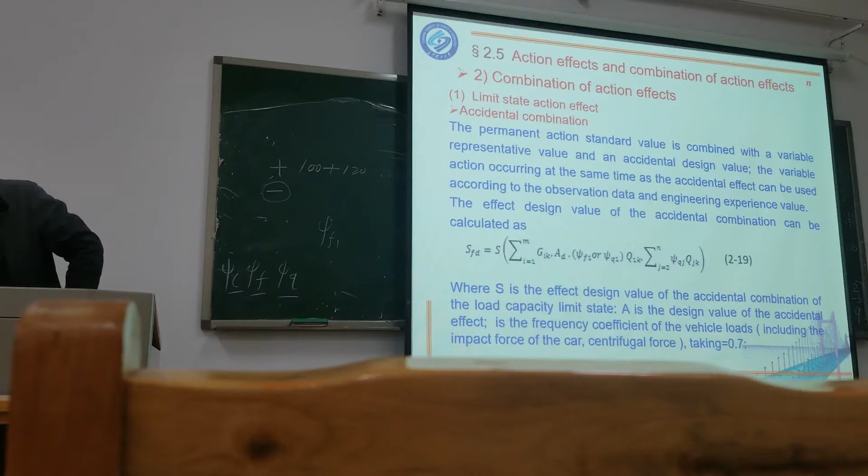So this is the second combination, the accidental combination. The third combination is the seismic combination. So that's special for seismic. Before, this seismic combination belonged to the accidental combination, but now in the new code they make a special combination for seismic because it is so important, so diverse.

So for bridge engineering, for the bearing capacity of the combination of the seismic action in limit state theory, we use this formula, where γ0 is the structural importance factor, 1.1, 1.0, or 0.9. SGIK is the permanent action effect.

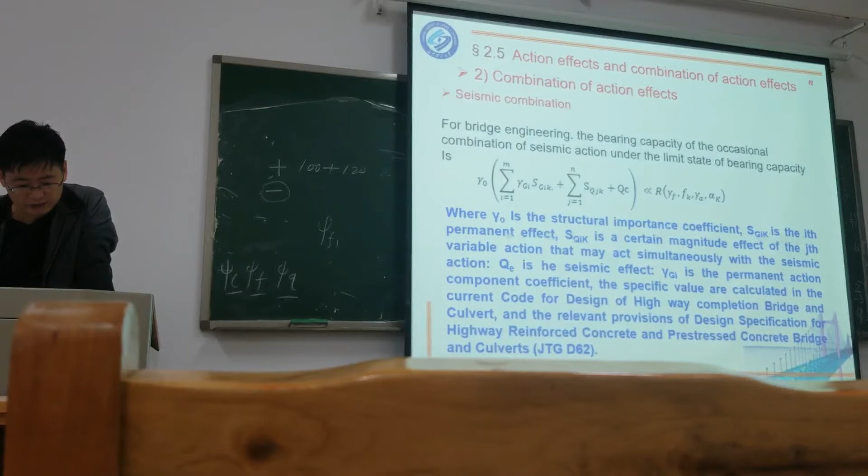QIK. Let's see. Which one? QJK. It should be QJK. Because in the formula it used QJK. Here we also use QJK. It's a certain magnitude effect of the variable action that may act simultaneously with the seismic action. So only if this can appear at the same time, you put it into the combination. If they don't appear at the same time, you cannot put it into the combination. So that means when the seismic action appears, this variable action also appears.

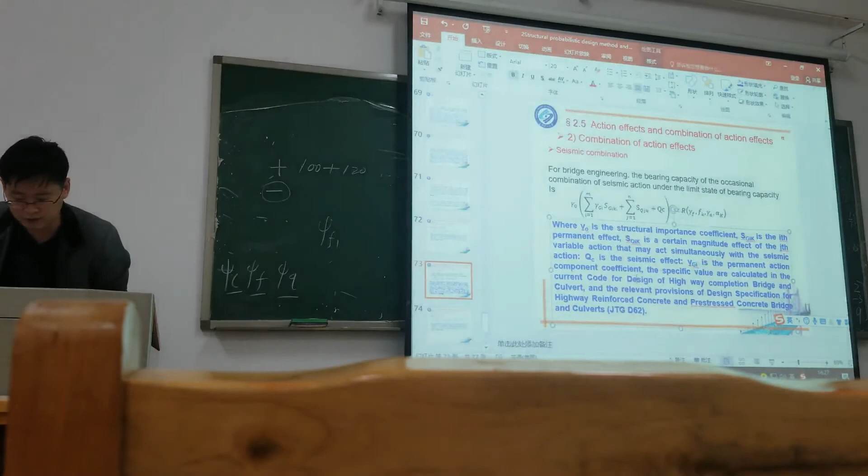QC is the seismic effect. Why are there so many things here? Translation. Here it should be QC. QC is the seismic effect. And here, gamma GI is the permanent action coefficient. Here it goes back and uses the component coefficient. Just now we used the partial coefficient.

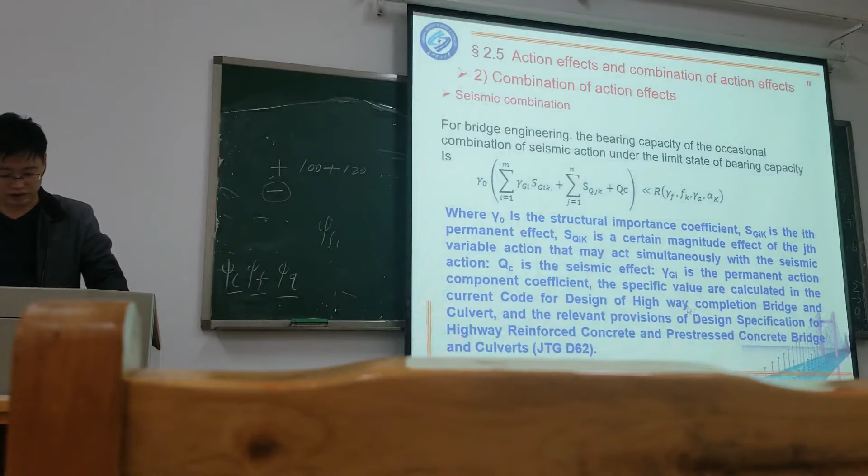Yeah, so for this textbook, it's the translation. Maybe different people translate different parts, so they use different words. Sometimes we get confused. So usually, component effect, component coefficient or partial coefficient, it's the same thing. The specific values are given in the design code for this bridge, the Chinese code. And the same thing applies where a variable effect in the combination exceeds the effect of the vehicle load, the same situation as here.

And another part of the action effect is for serviceability. The former part, the combinations we just introduced, is for the bearing capacity state. And now this part is for serviceability. Because for limit states, we have the bearing capacity limit state and the serviceability limit state. The basic combination, the accidental combination, and the seismic combination, all three are used for the design of the bearing capacity limit state.

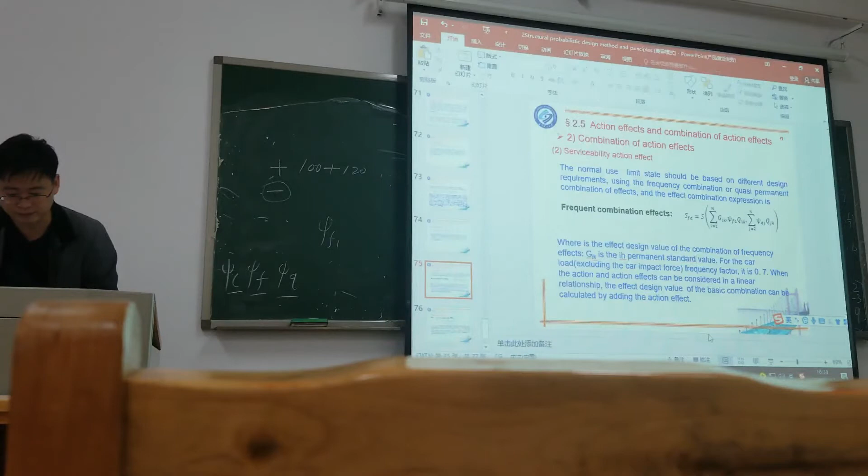But in the book is okay? Yeah, the book is okay. But just because this electronic one, I just took a picture and scanned it, translated it, so it makes some mistakes. But in this book it is okay.

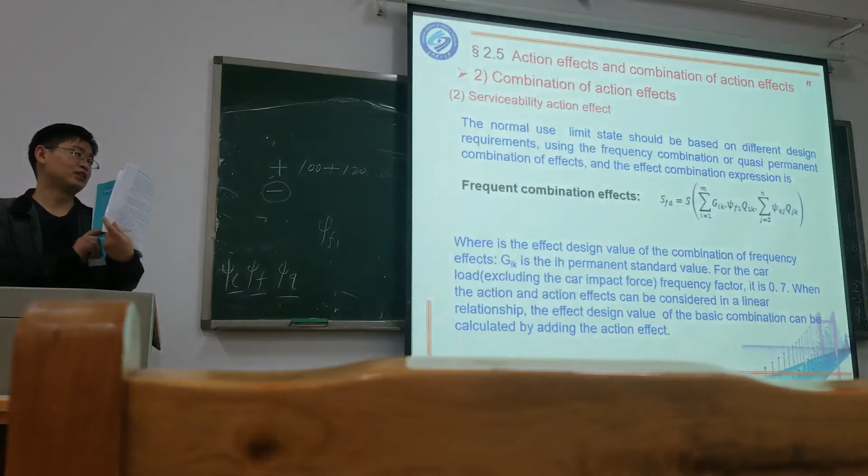So another combination is a quasi-permanent combination effect. Quasi-permanent. So frequent combination. So as just now I said, for these two different combinations, which one do you think has the larger value? This one is larger, or this one is larger? I suppose this one. No, the other. This one. Yeah. No. I said for the first case, we go back to here.

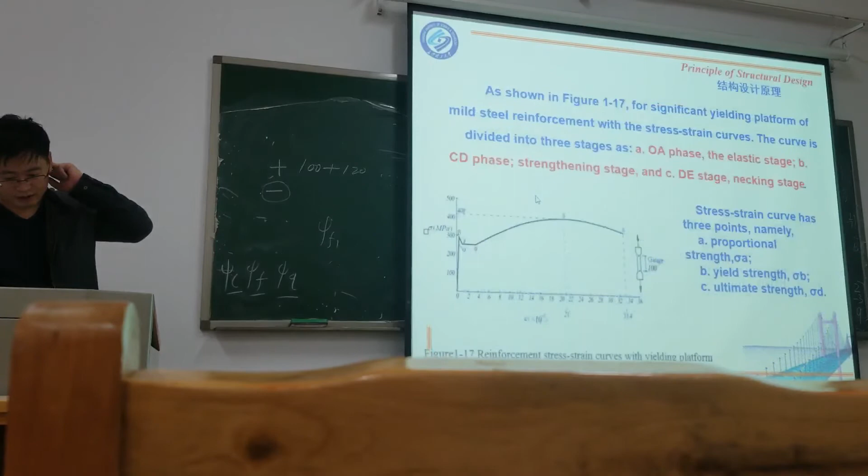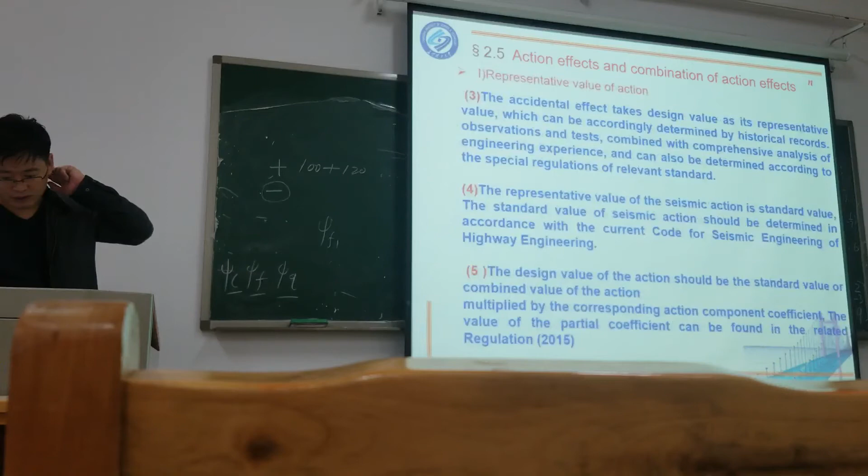Design value, no, here. Which one? Okay, we call this. Yeah, here. Because we said for the variable action, we got different values. The basic one is the standard value. Besides the standard value, we got a combination value, frequent value, quasi-permanent value.

For this frequent value, the meaning is during the design period, suppose 100 years, this value appears very rarely. The load value larger than this frequent value appears very rarely. So this value actually is a relatively large value. Maybe during these 100 years, the situation larger than this value is maybe only 1% or 5%, something like this. Very small chance to appear.

So this frequent value actually is a very high level of the variable action. And for the quasi-permanent value, actually during these 100 years, most of the time the value is larger than this. That means this value actually is relatively at the average level. Because sometimes on the bridge there's no vehicle, sometimes just one or two vehicles, sometimes when it's busy, it's full of cars. So in different situations, the load of the vehicles is different.

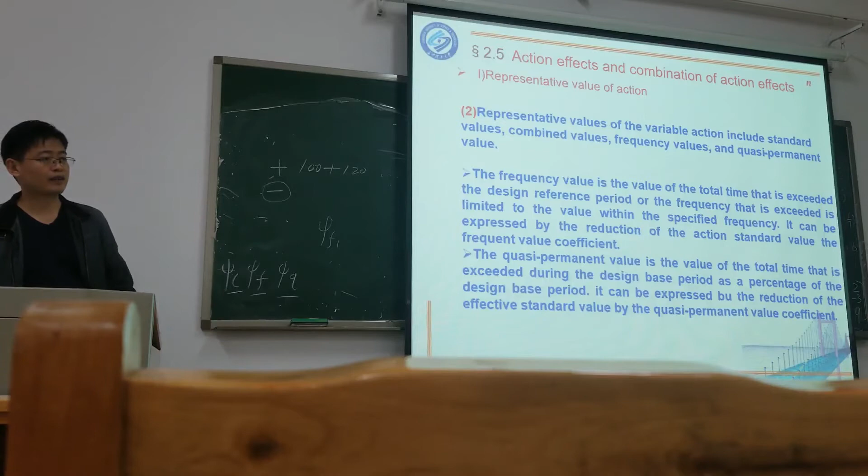So this value, maybe you can look at it as the mean value, suppose 10 cars on the bridge. And most of the time there are more than 10 cars on the bridge. And for this value, you can look at it as maybe 100 cars on the bridge. But most of the time it is less than 100 cars, maybe just 80 or 90 or 70, something like this. So the quasi-permanent value actually is the value that appears very often. So that's the quasi-permanent condition.

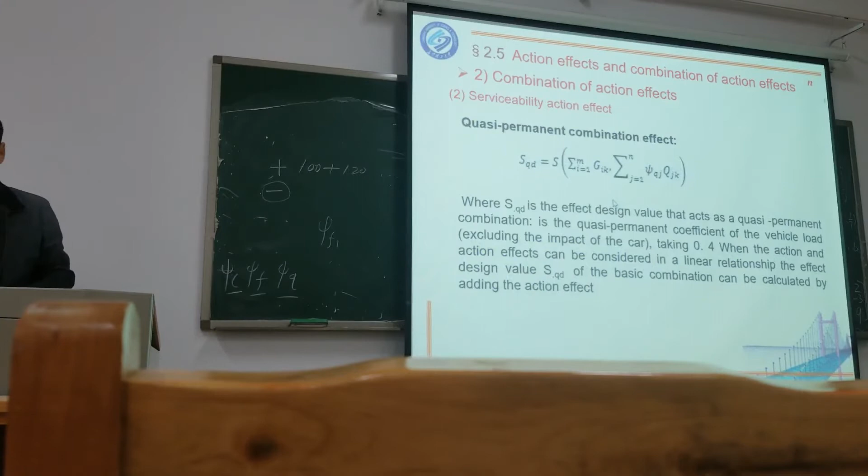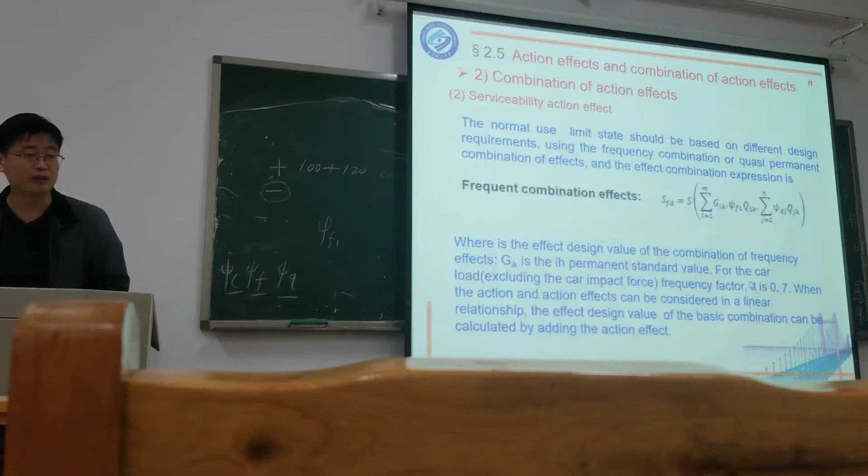Actually, these two combination formula expressions are very similar. Just the meaning of the symbols reflects the difference. So here SQD is the effect design value for the quasi-permanent combination. Also here I missed my symbol. What's this? It is psi qj here. Psi qj is the quasi-permanent coefficient of the vehicle, taking 0.4, so the value is smaller. Here we use 0.7, here we use 0.4, so it's relatively smaller.

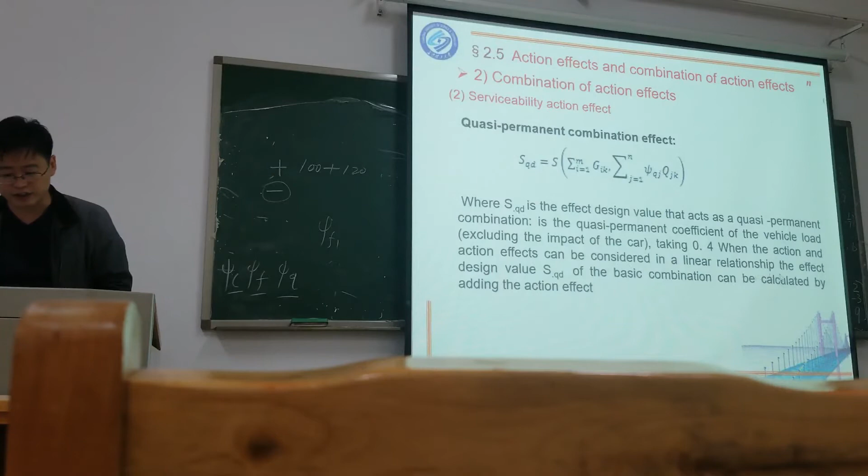When the action and the action effect can be considered in a linear relationship, the effect design value SQD of the basic combination can be calculated by adding the action effects. That's 1 plus 1 plus 1. Because it's a linear relationship, we can write it like this.

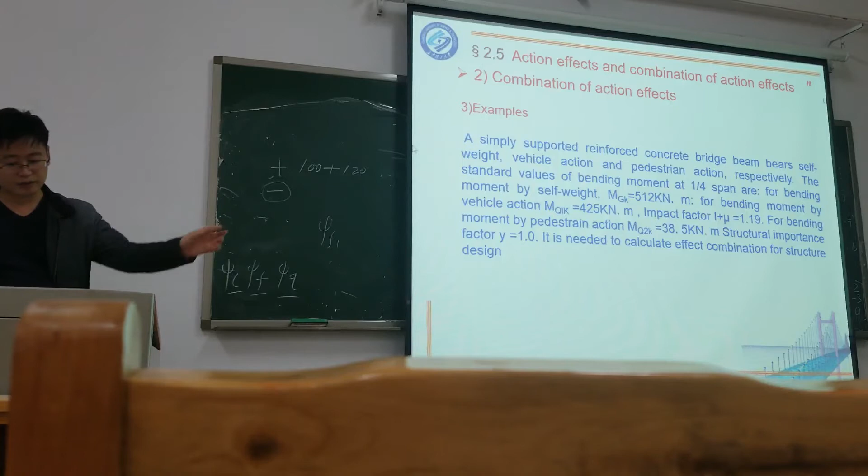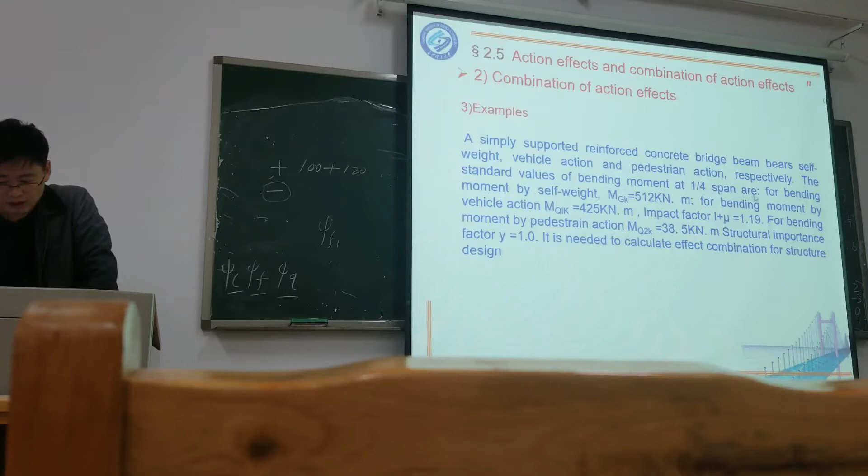So finally our book gives an example of how to do the combination. This example is a simply supported reinforced concrete bridge beam, bearing the self-weight, vehicle action, and pedestrian action respectively. The standard value of the bending moment at the quarter span for bending moment by self-weight is 512 kilonewton meters. For bending moment by the vehicle action it is 425, and the impact factor is 1.19. For bending moment by pedestrian action it is 38.5. The structural importance factor is 1.0.

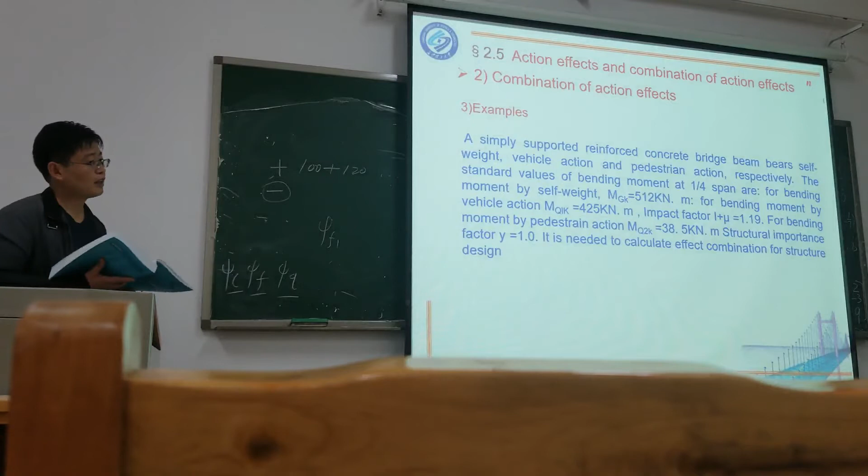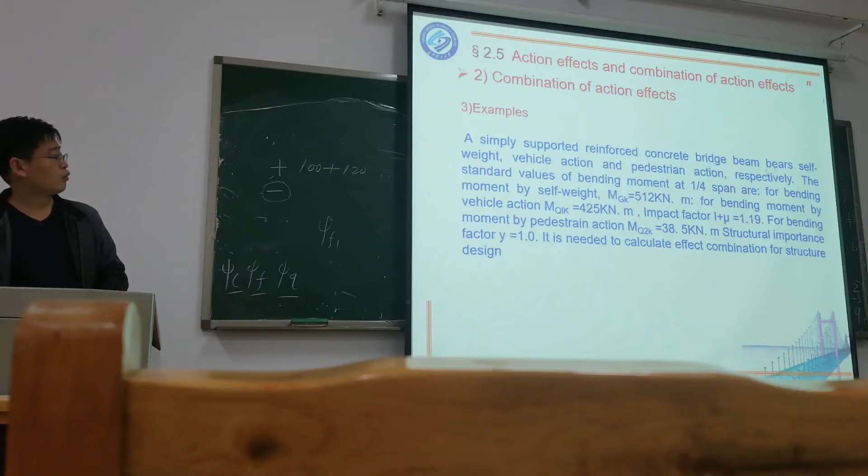So we need to calculate the effect combination for the structure design. If you do this design, what should we do? So first, the basic combination, used for the load-carrying capacity limit state, or the ultimate limit state. For this combination, we got self-weight, vehicle action, and pedestrian action. So relatively simple. In this example, only three: one is the permanent action, and only two variable actions, the vehicle and the pedestrian. So it's pretty simple.

And the importance factor gamma 0 is 1, so we just only consider it.

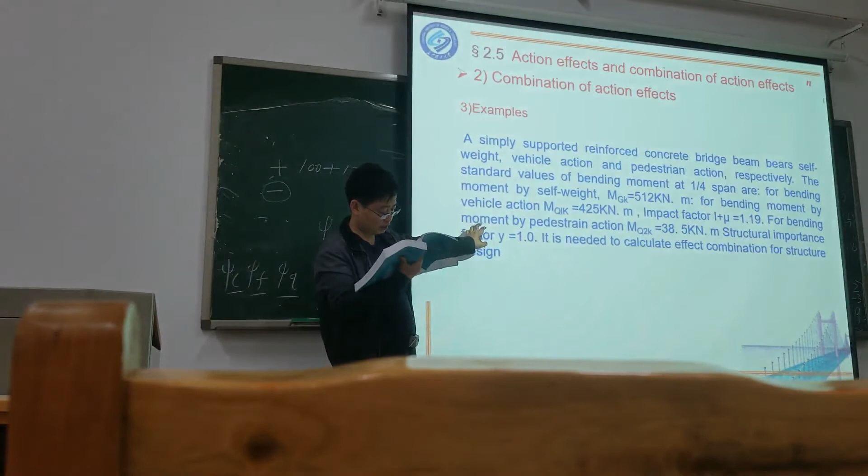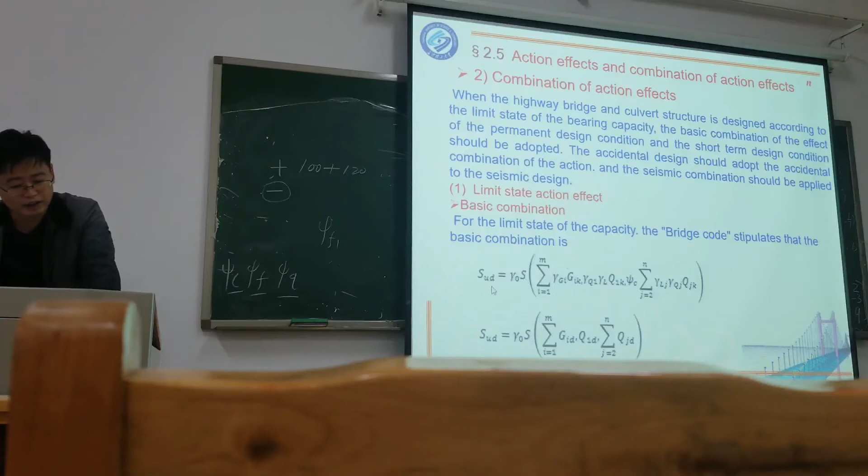So if we do the basic combination, we go back to this combination. Basic combination, see here, in this formula, gamma 0 now is 1. We don't consider it now. So for the permanent action, we only got the self-weight. And for this example, it's a simply supported beam, so the self-weight is unfavorable to the structure.

So this gamma G i, because there's only one type of permanent action, i is 1. So now we only got gamma G1. Gamma G1, what's the value to be? 1.2 or 1.0? 1.2, because it's unfavorable to the structure.

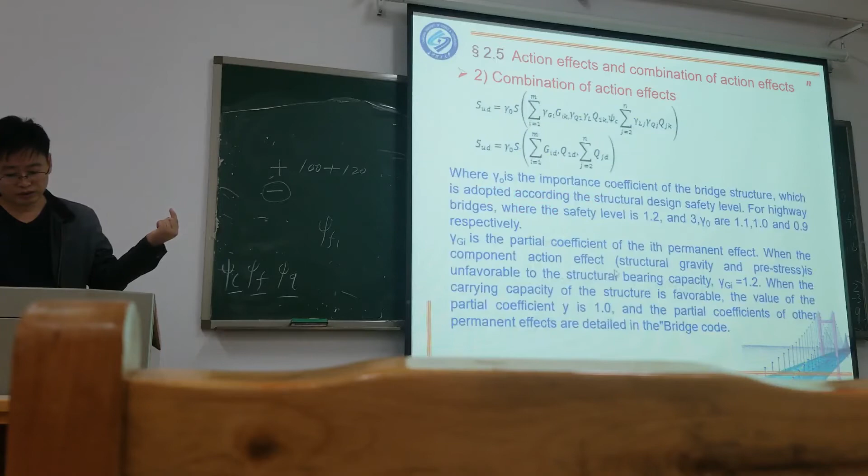Another is gamma Q, because we got the vehicle and the pedestrian. So we see the vehicle is the main variable action, normally we use the partial coefficient 1.4, because of course the pedestrian load is smaller than the vehicle load. The vehicle is the main variable action, so for vehicle we use 1.4. And for the pedestrian, what should we use?

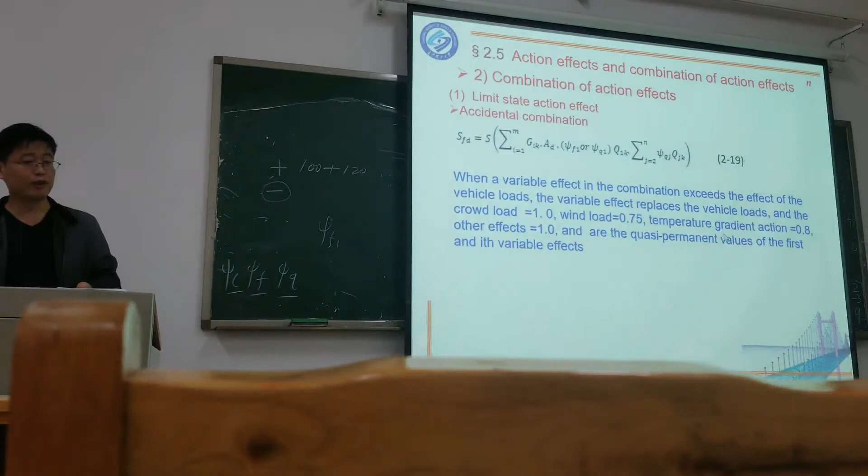Actually, 0.75. Yeah, variable action. So that means we got different coefficients for different variable actions. Now we can just use the formula. We can write this.

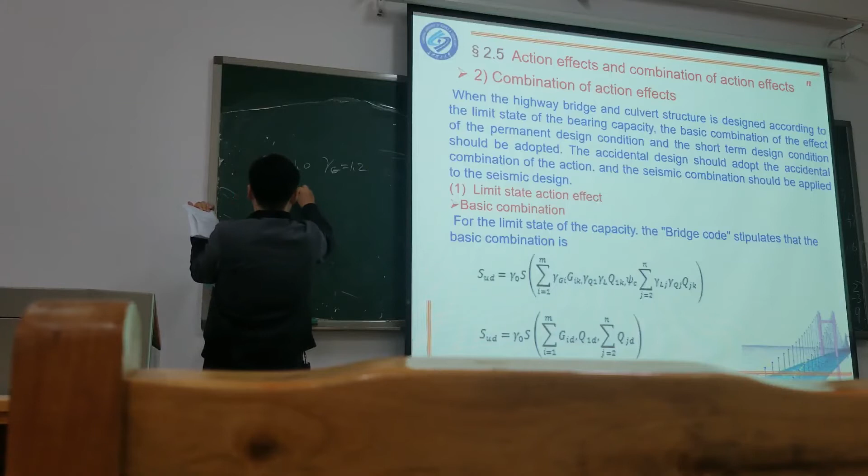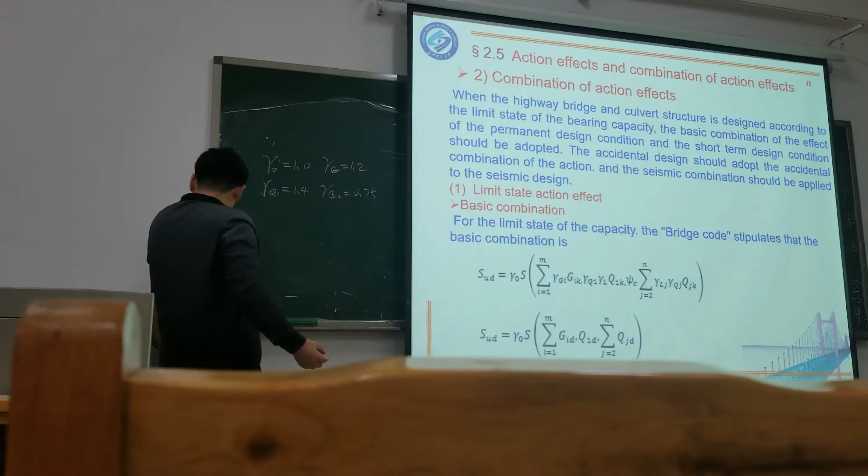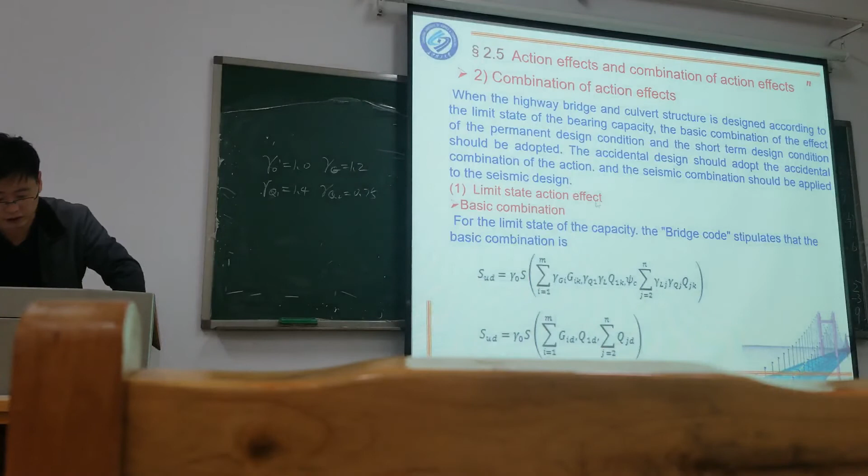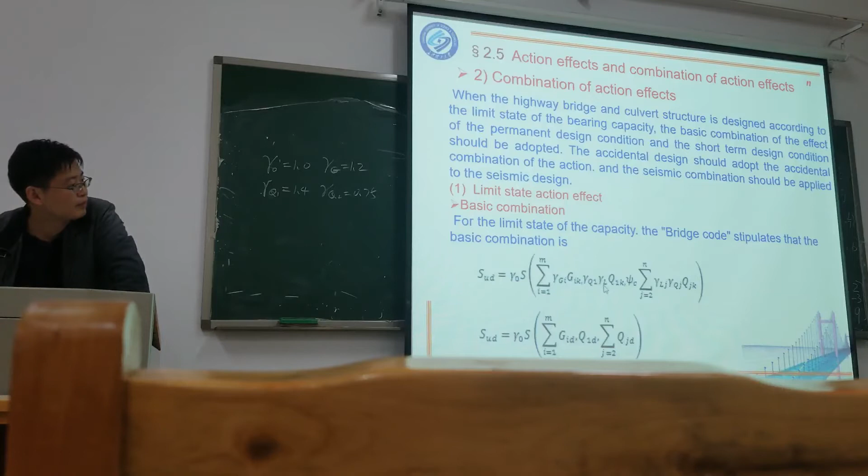So gamma 0, 1.0, gamma G 1.2, gamma Q1 1.4, gamma Q2 0.75. And also, besides this, maybe we have forgotten another value: gamma L, gamma L. Gamma Q2, is it 0.74? 0.75? Is it 0.75? Yeah.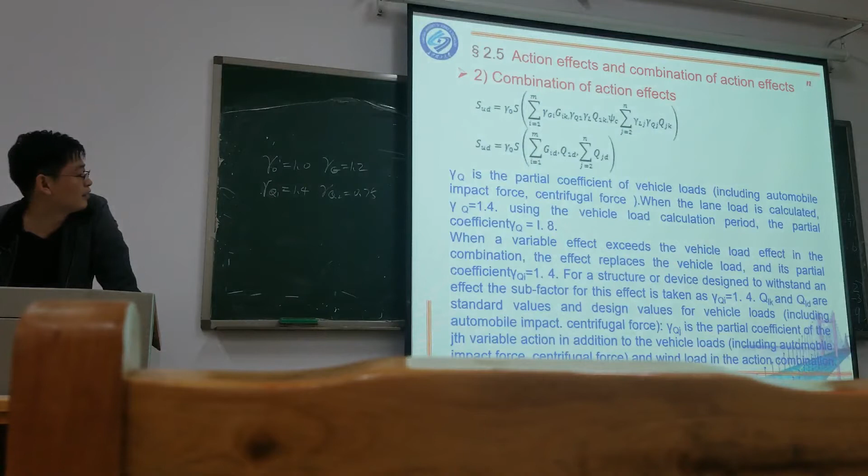Is this gamma or is it psi? Yeah, here we should use gamma. It's not psi. It should have been gamma. Should use the symbol gamma. Gamma, and let me see, another one. I think maybe it's a mistake. Which one? Gamma Q1. This one, the same.

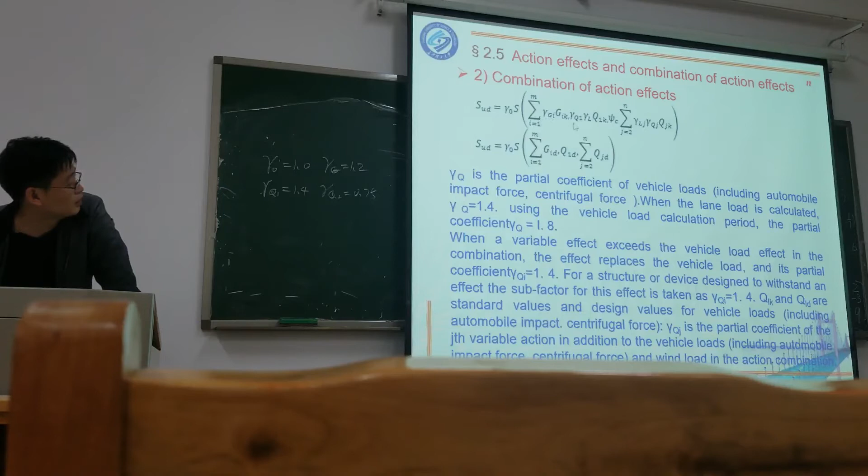So here we got gamma Q1, gamma Qi, and also gamma L. We need to find gamma L, another coefficient. Because see in this formula, besides gamma G and gamma Q, there's also gamma L. So let's see if I missed some content here. Gamma L is almost the same as the one after the sum. Gamma L 1.0. Here we missed something, something's supposed to be there.

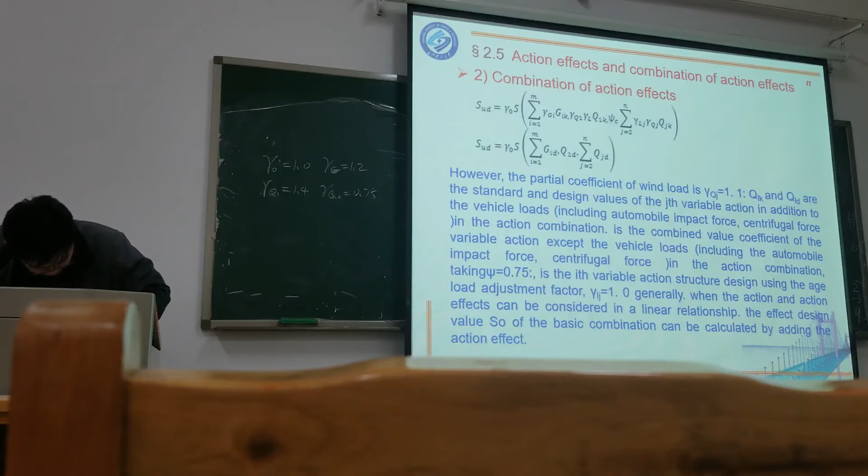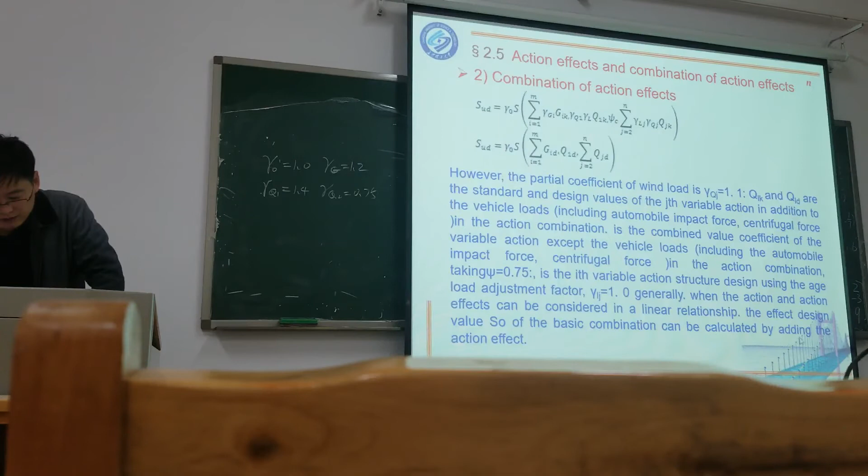Here, gamma L is the coefficient considering the design life effect actually. Okay, in this one, see, same example. I think the gamma Q here, because this one is for when i is 1. So this is a different version.

In this new version, they use psi. However, the partial coefficient of wind load now is to use 1.1, not this. So it's quite confusing to use this value. The first one, 1.4, is the same, no problem. The second one, gamma Q2, is also 1.4.

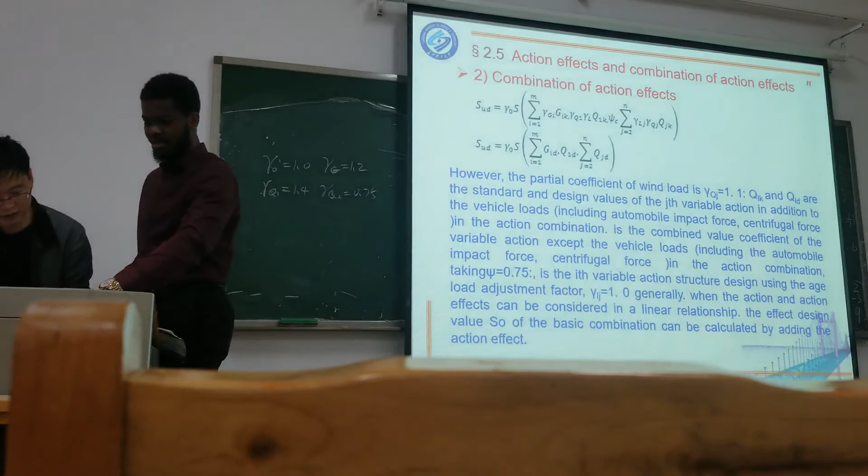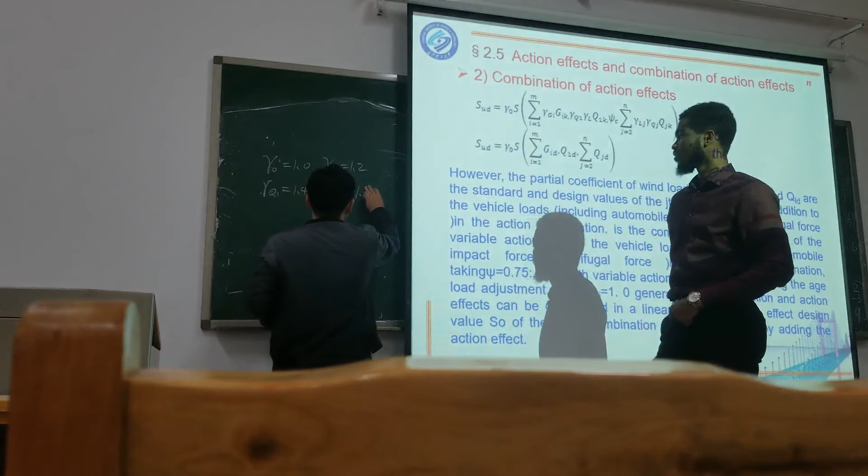Because here, for this example, gamma Q2 is also 1.4. But I think the difference is this one. Okay, I think now in the PPT there is something missing. Here, my mistake. This should be 1.4 here. And I also got psi C here, 0.75.

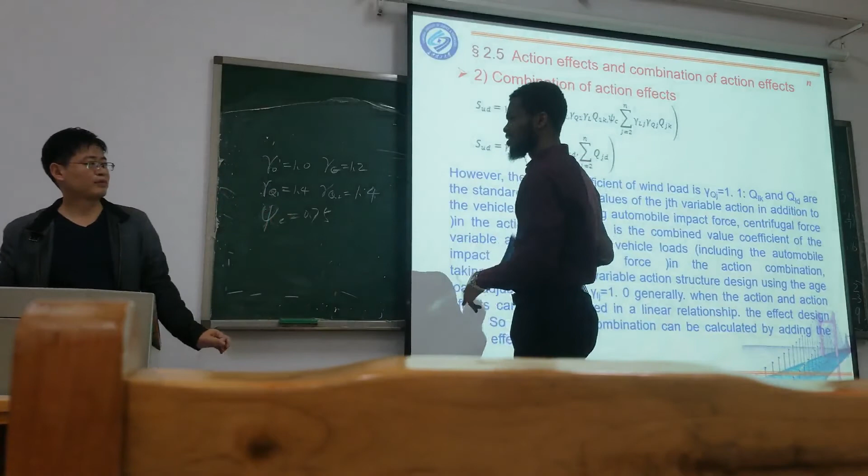It's psi here. Oh yes, it's psi. I think maybe it's just the English translation. It's very different between the old version and the new version of the code for highway bridges and culverts.

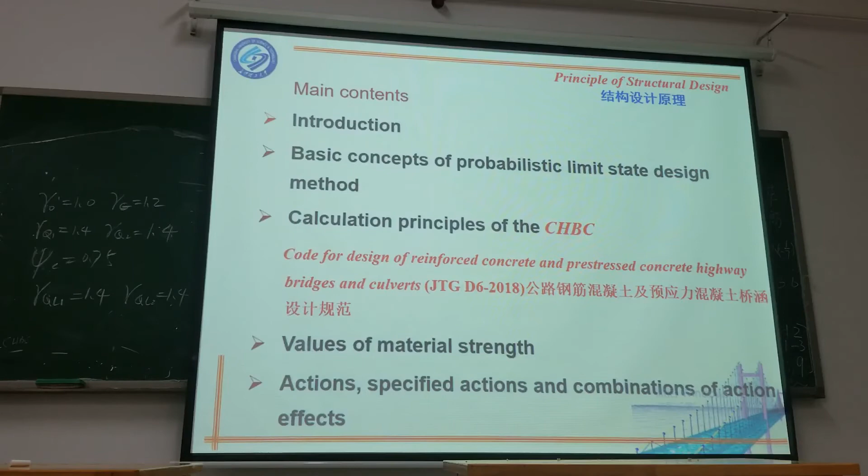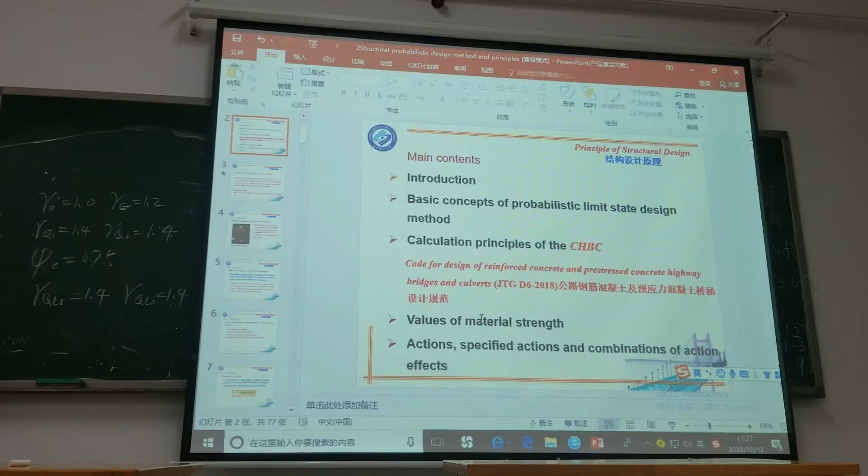Okay. So now we finished chapter 2, and I think the example for the combination, when you got this textbook, you see this sample, and then you make this value and the class, it's more clear, I think. So now today we finished chapter 2, we continue to chapter 3.

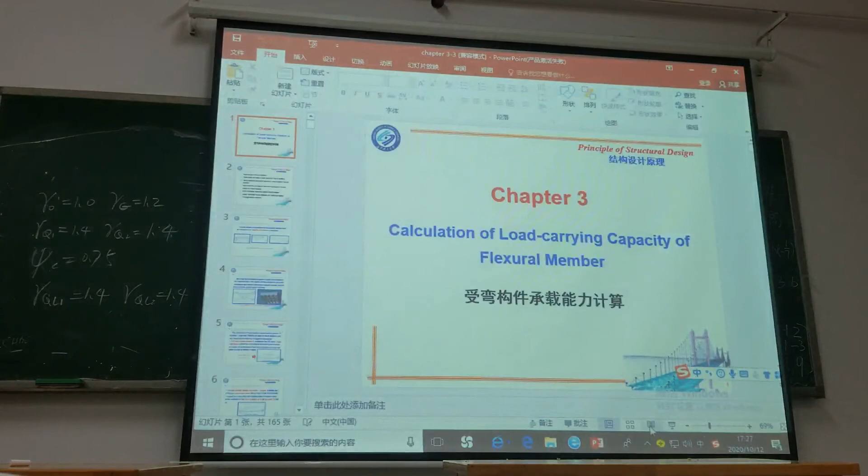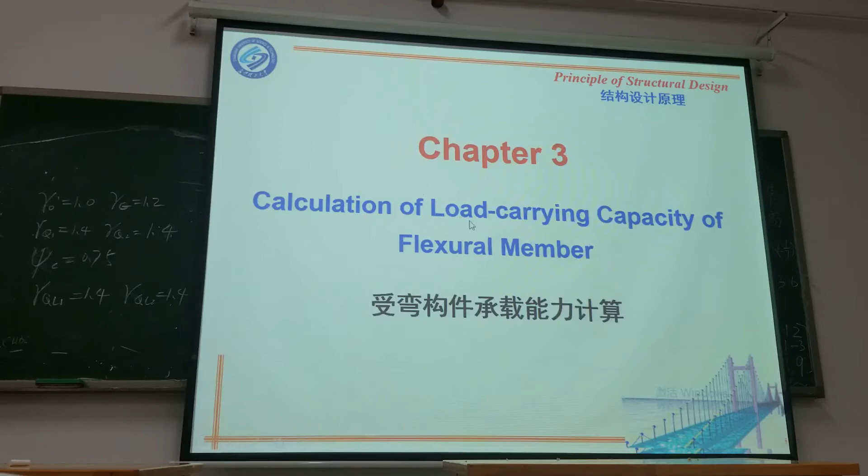So chapter 3 is mainly talking about the calculation of the load carrying capacity of flexural members. See, the target is a flexural member. The content is the calculation of the load carrying capacity. So in this chapter there is a little bit more content. And this chapter is the most important one. Chapter 3 and chapter 4, these two chapters, I think are the most important content.

Basic concept of the flexural member and the construction of the flexural member, failure mode, and the mechanical behavior of the whole process for flexural members. The basic calculation principle for the load carrying capacity of the normal section of flexural members: singly reinforced rectangular section flexural members, doubly reinforced flexural members, and T-shaped flexural members.

So I think when we finish this class, we have got a design work, design homework. We have two weeks time for this design work. Maybe we are going to do some T-shaped girder design also. Okay.

So you see the first part, basic concept of flexural member. Actually, at the beginning we have taught the flexural member. With a beam or plate bearing load, they are bending. So in this situation, the lower part is in tension and the upper part is in compression. And in this structure, there is only the vertical force, no horizontal force. So this is actually the situation for the flexural member. So we neglect the axial force, the horizontal force.

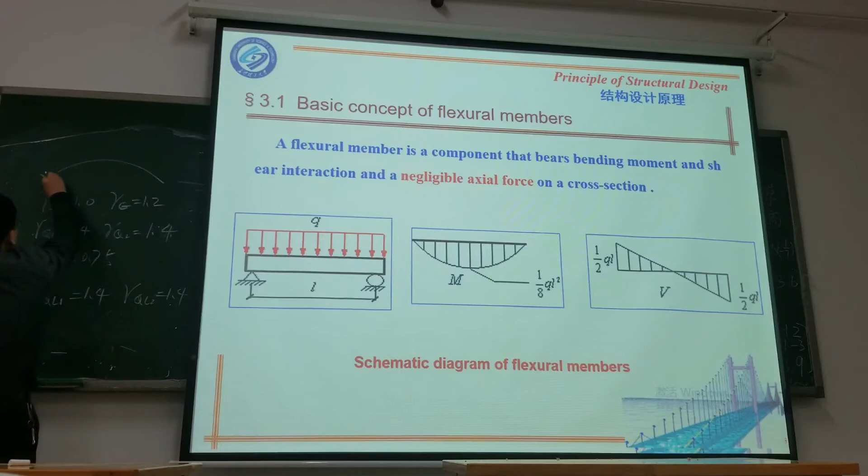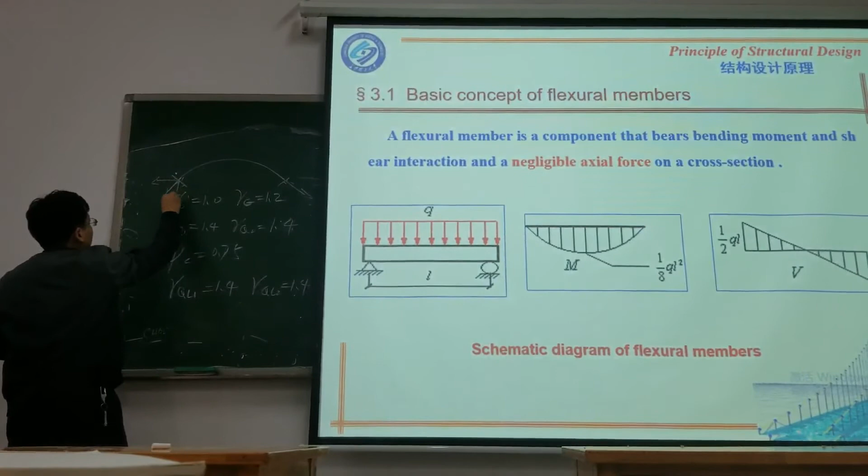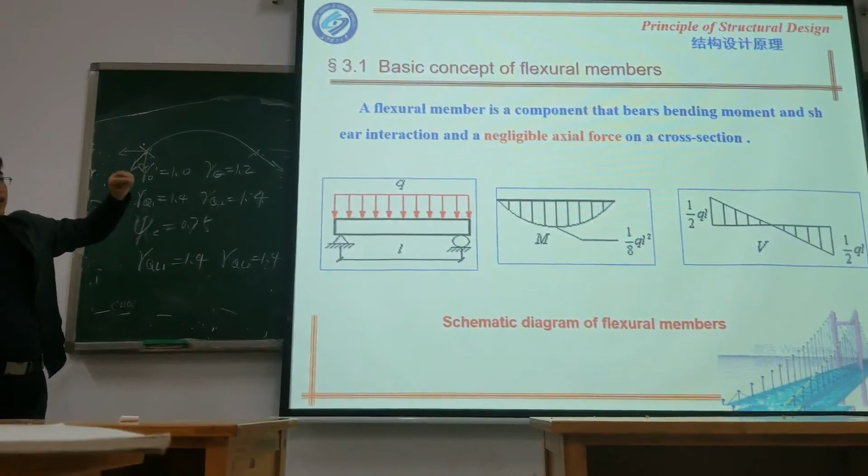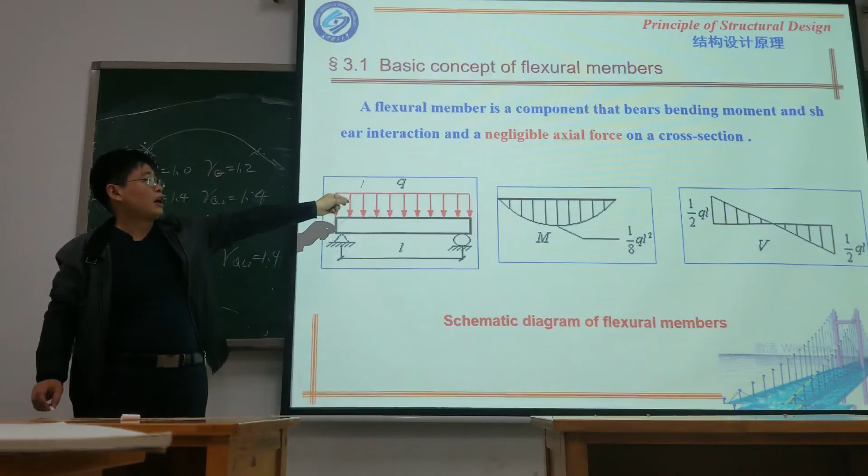But we said for the arch bridge, because the force is along this direction, inside it actually has not only vertical but also horizontal force. For the arch bridge and the beam bridge, the biggest difference is the horizontal force. But now we're talking about the flexural member. Here we neglect the axial force, the axial force is actually the horizontal force. We only consider the vertical force.

So the flexural member is the component with bending moment and shear interaction, neglecting the axial force. So the moment and the shear force, all we can see is in the vertical direction. We negligible, how's the word? Negligible. Actually, here we should not use this word. We should use neglecting axial force.

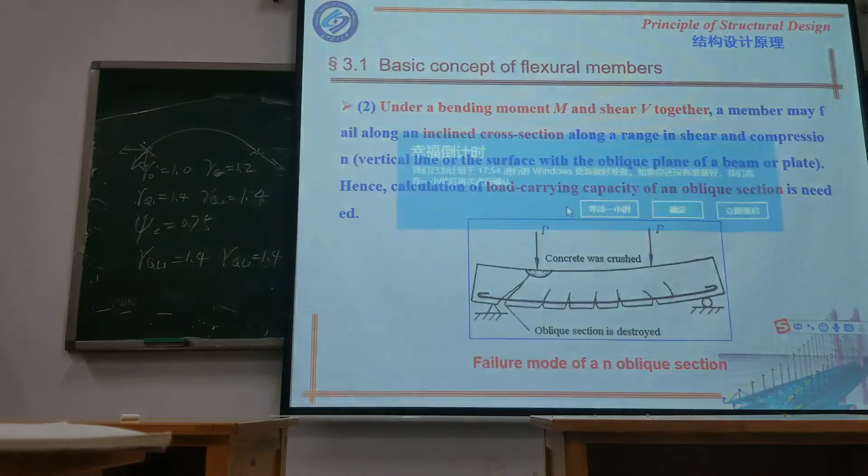On the previous slide, so you're saying if the moment is high, then the crack will be in the middle? Yeah, if the moment is too high, the most dangerous position may be here, because we know for the simply supported beam, the moment increases greatly from the bearing support to the middle. But the biggest shear force is here. The shear force at the bearing support position is the largest.

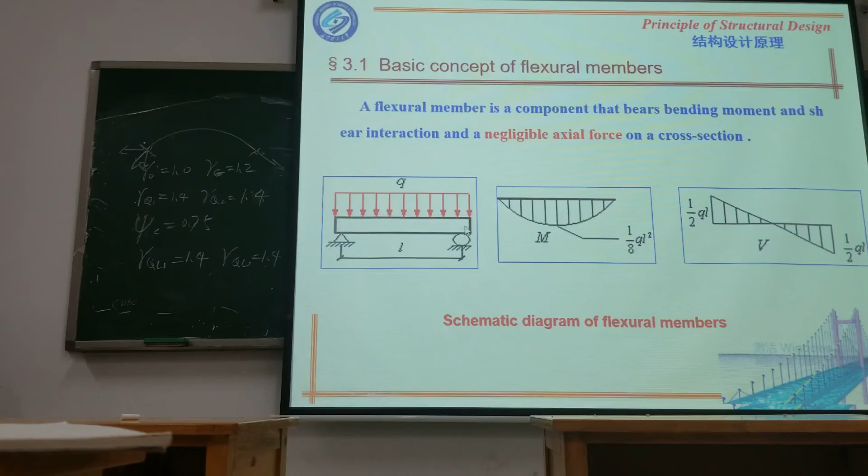So when the moment is large, the dangerous position is here in the middle. If the shear force is too large, the dangerous position is near the bearing support position. So for the moment too large, it's broken like this. For the shear force too large, it's broken like this.

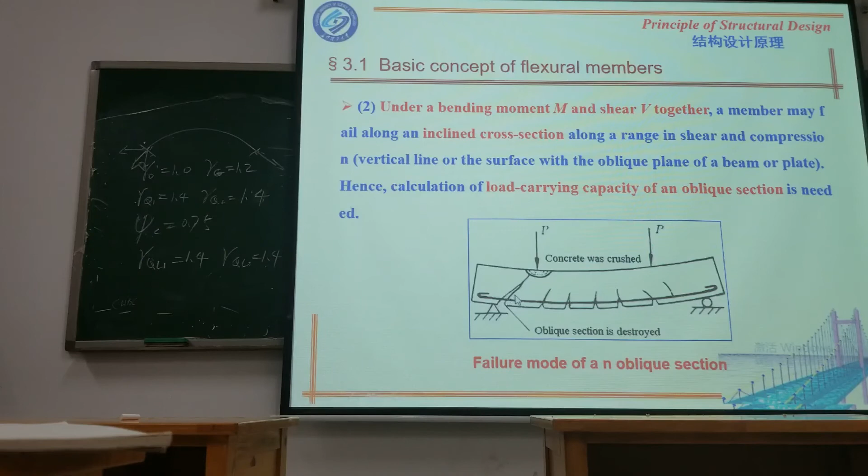But in this chapter, we mainly focus on the normal cross section, the design of the normal section. Chapter 4, we focus on the inclined section. So the aim is to determine and design the area of the longitudinal steel reinforcement of the reinforced concrete beam and plate, given the design value M. So you have to calculate how much steel you should put inside and which position, at the bottom or the top.

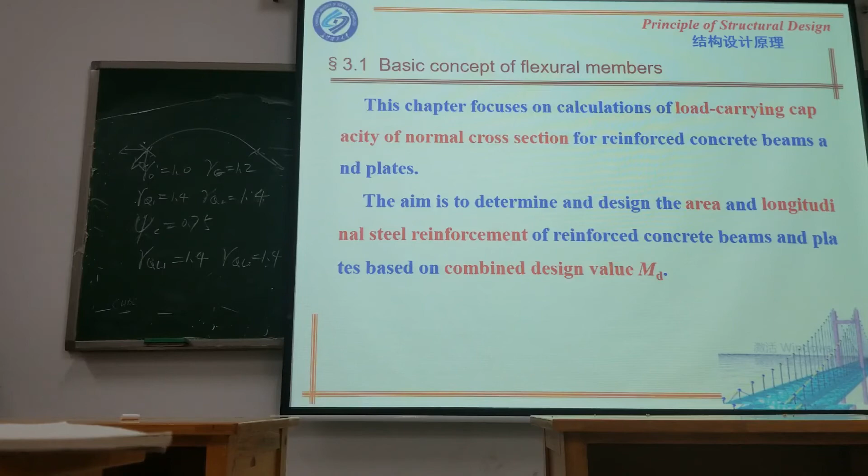Yeah, because we said at the beginning we have single reinforced and double reinforced. Single reinforced, for this rectangular section, normally the steel bar is at the bottom. Double reinforcement means sometimes we also put the steel bar on top, because for the continuous beam, continuous bridge,

normally in the middle the moment is a positive moment, as for this simply supported beam. But for this continuous bridge, the moment is like this. At the middle supporting point, the negative moment is also very large. That means at this position, you need steel bar on the top to bear the negative moment. So in some situations we need to do this double reinforcement. Okay.

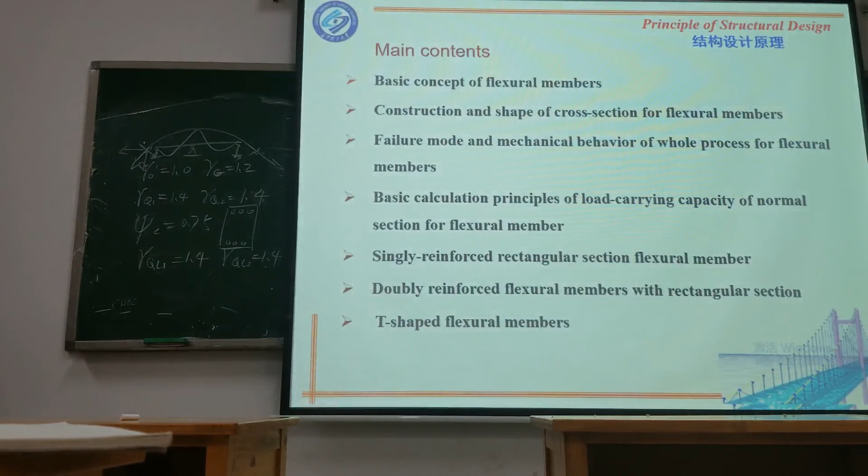So the second part, 3.2, covers some of the requirements for the construction and design, construction and shape of the cross section for the flexural member. Construction requirement - what's the construction requirement? It's based on specification or lessons learned from the project.

Yeah, from the real project. Some of these are restrictions on the component size and the material strength. That means for a special position in your structure, the size of the section cannot be too small or too large, something like this. Mostly based on real project lessons. And so the material strength, grade, variety, steel quality, layout, location, space, diameter, something like this.

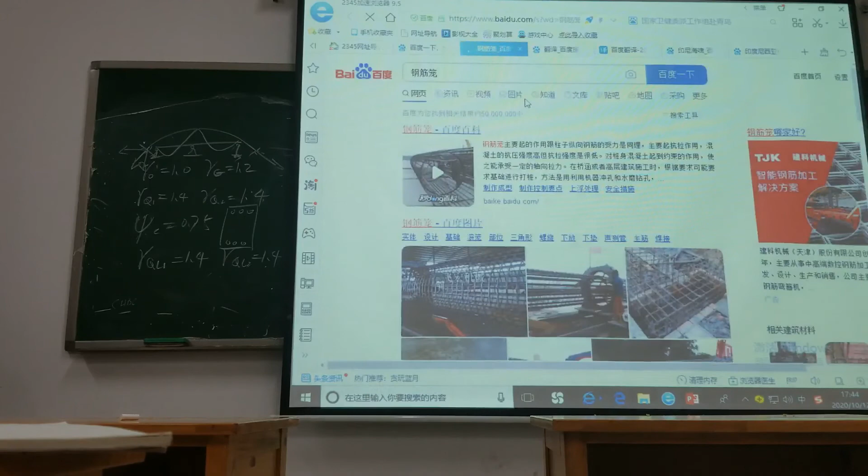Because, I'll say for some of the reinforcement skeleton, you see, find some picture. So you see this picture, the dimension between the two steel bars has a requirement - normally not less than 10 centimeters or something like this. So that requirement belongs to the construction requirement, because if this dimension is too small, when you pour the concrete inside, it becomes difficult.

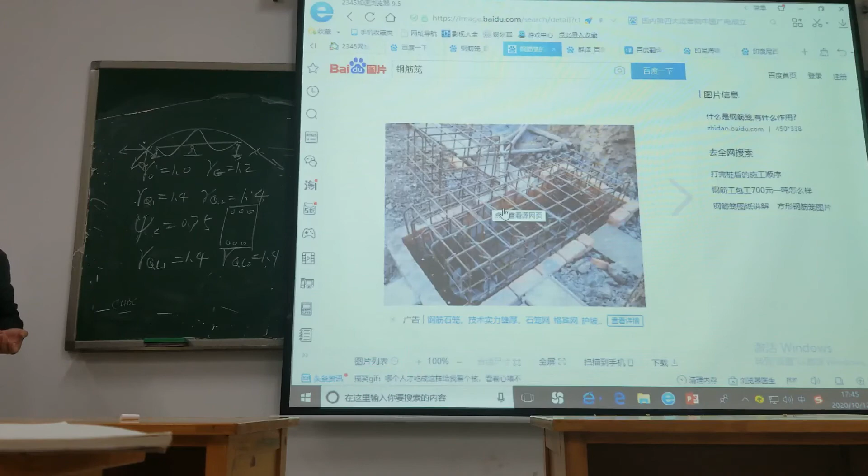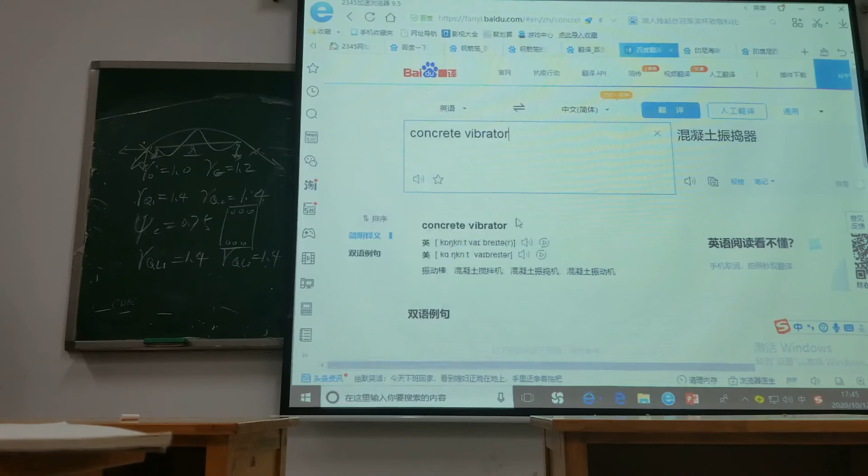So that's some of the construction requirements, not related to the calculation. Just because for construction, besides the calculation where you satisfy the loading capacity, you should also satisfy the construction requirement - make it possible to construct.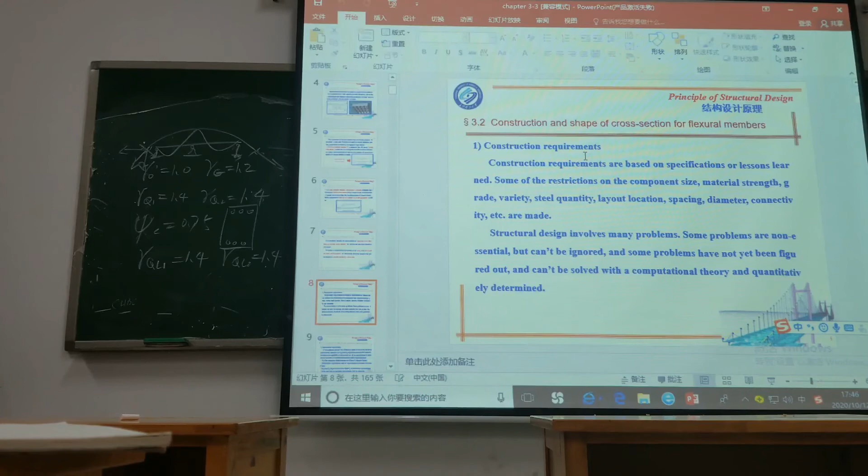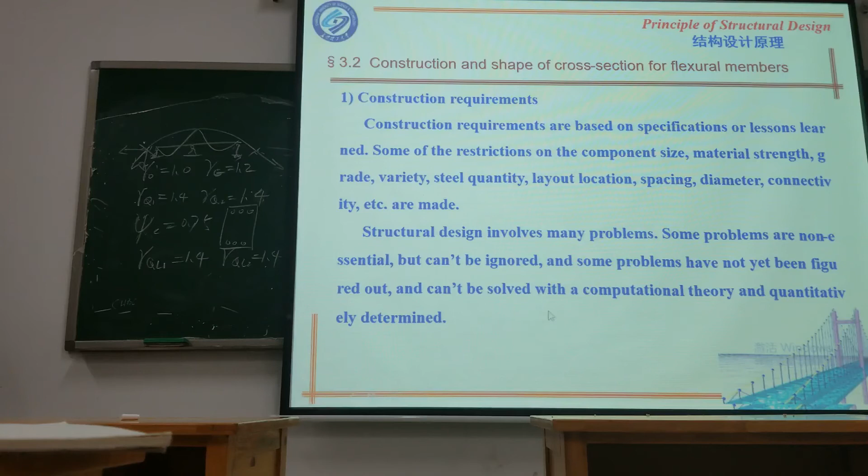And structure design involves many problems. Some problems are non-essential but cannot be ignored. Some problems have not yet been figured out and cannot be solved with computation theory and quantitatively determined. So all the problems that cannot be reflected by the design formula and identified quantitatively, according to engineering experience and scientific research, considering the possibility of construction as well as the requirement of technical and economic factors, are summarized here.

The first part is to offset the theoretical disadvantage and the effect of uncertain factors. That means some of the theory or formula actually comes from experience or experiment - it's not exactly correct, so you should make some requirements to make sure there's some space to make it safer. So, offset the theory disadvantage.

And the construction requirement, such as the requirement of minimum thickness of the plate, thickness with or thickness the cover thickness. Some plates you cannot make too thin - for the real situation, you must make sure you have enough cover thickness to protect the reinforcement inside. The engineering experience, such as spacing with distribution reinforcement - just now I said if the spacing is too small, it's not possible, so that's the engineering experience.

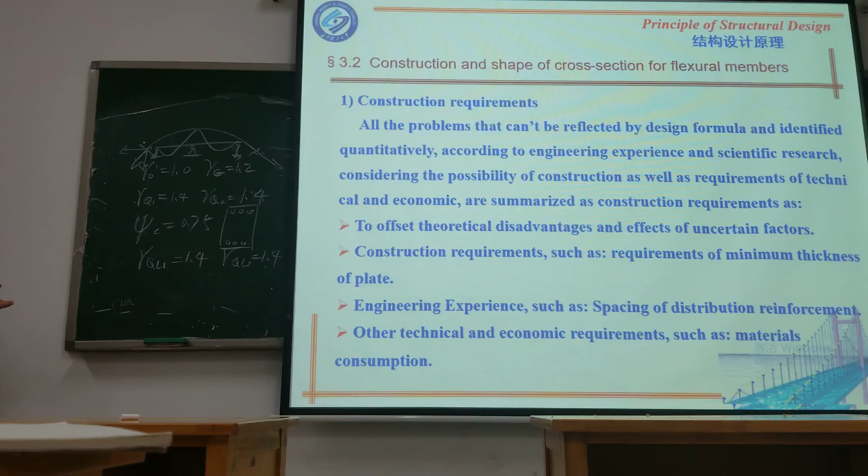And the other technical and economic requirements, such as materials consumption, something like this. So that means the construction requirement mostly comes from lessons from real projects, and some is for perfecting the theory, because in civil engineering there's no exactly perfect theory or formula for calculation, especially for some very complicated structures or situations - you should make sure there's some safety space to make the structure safe.

The role of the construction requirement in structure design is to provide a reference for preliminary sizing of the component. Something like H divided by L, where L is the span and H is the height, like for a beam. Suppose we ask you to design a beam, and the span is 40 meters long. So when we design, how do we check the height of the beam - how much do we use, 4 meters, 5 meters, 6 meters, something like this?

So if the span is fixed, the height of the beam has a scope for design. Actually, it's based on experience.

Something like this, 1 divided by 10 to 1 divided by 18. Because for the value in this scope it's more economic and safer, something like this. Maybe if you don't use this value, if 1 divided by 9 or 1 divided by 20, you also can make a finished design, but the design maybe is not very good. Maybe you wasted too much material, or it's not so safe, something like this.

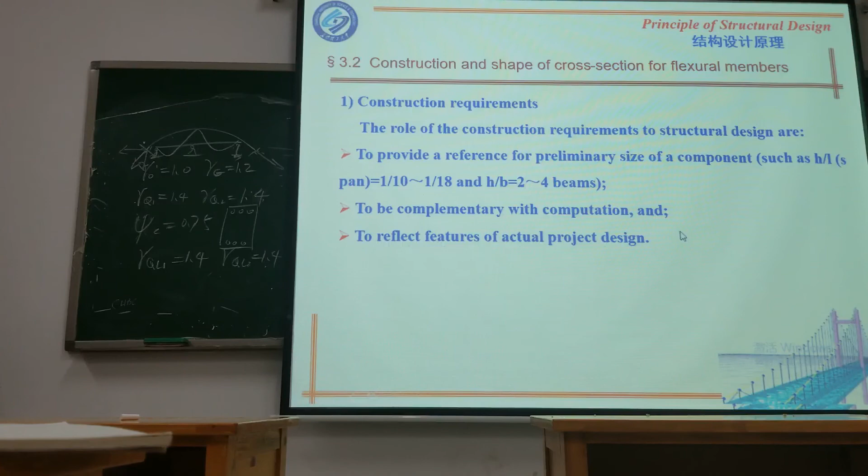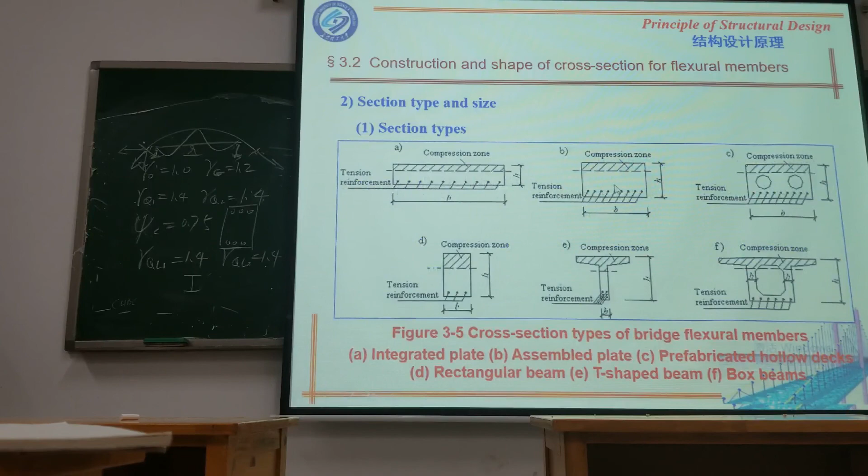The second type of the reinforced concrete beam is slab. This mainly these three types: the integrated, the assembled, and the prefabricated hollow decks. And for the beam section, such as the rectangular T-shape, I-shape, box shape, and the inverted T-shape. Inverted T-shape is not used often.

Okay, the type of the plate section, such as the flat deck, porous plate, this is most used, just like this.

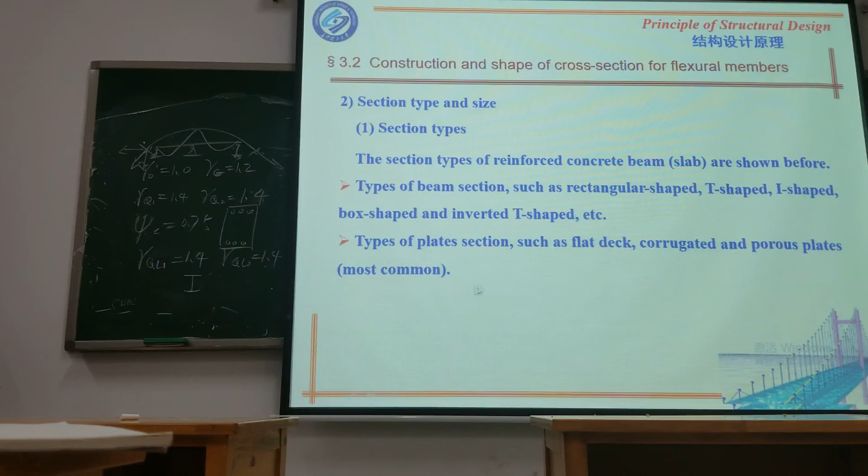And some of the size requirements. The size requirement of the slab. Integrated cast-in-site slab, section width is large, but unit width, for example, 1 meter for the unit, for the rectangular cross-section used for calculation.

When you design, when you calculate, normally we use a 1 meter wide plate calculation, because this is an integrated cast-in-site slab. Maybe the slab is 10 meters wide, you just cast it inside in one time to make it. But when you calculate it, normally we don't just make the model 10 meters wide, we just build the 1 meter wide model for calculation.

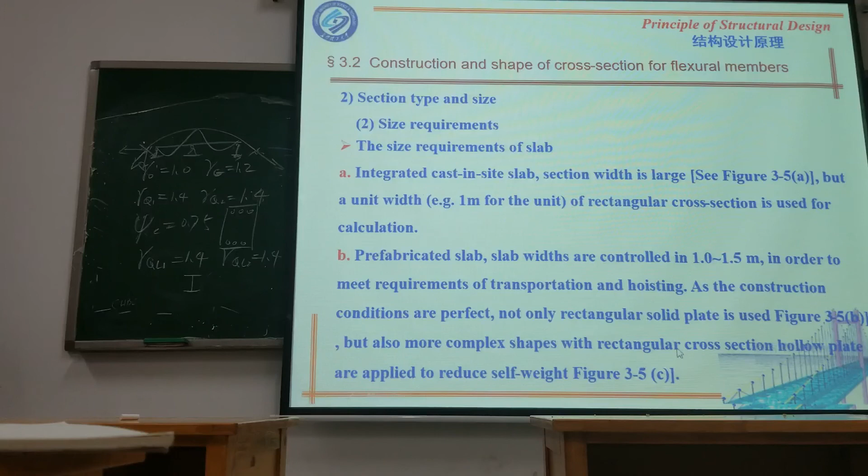For the prefabricated slab, it's controlled at 1 meter to 1.5 meters in order to meet the requirement of transportation and hoisting, and so the construction conditions are good. Not only is a rectangular solid plate used, but also more complex shapes with rectangular cross section, hollow plate, are used.

Slab thickness H is controlled by the largest bending moment in the control cross section, and the bending stiffness of the slab, and needs to meet the construction requirements for the slab. So what's the meaning? The thickness H is controlled by the largest bending moment. So the thickness cannot be too small or too large, because the plate is bearing some moment. Usually it's determined by calculation.

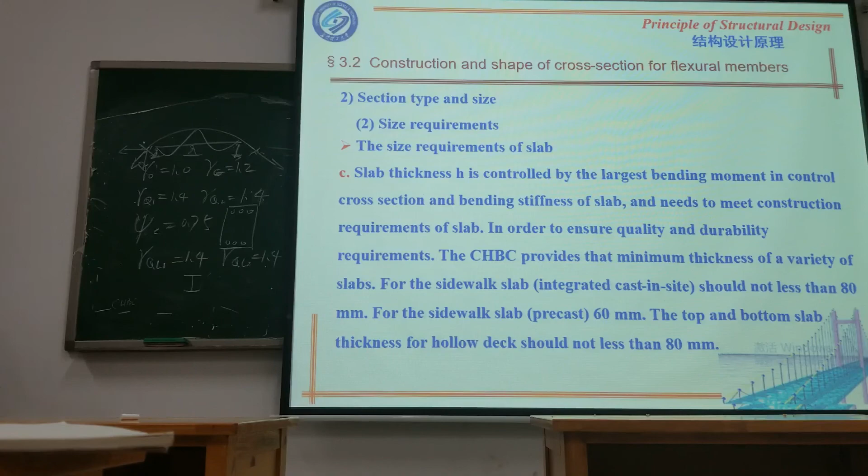Because of the material, for the concrete and steel, everything inside a rectangular beam. This is the size requirement for the beam. This part is for the slab. So slab and beam are different.

So for the beam, the width of the cast-in-site rectangular beam is often taken as 120, 150 millimeters, like this. The beam is increased by 50 millimeters. When the beam height is larger than 800 millimeters, they increase by 100 millimeters. The ratio of height to width for the rectangular beam is generally taken as 2 to 2.5.

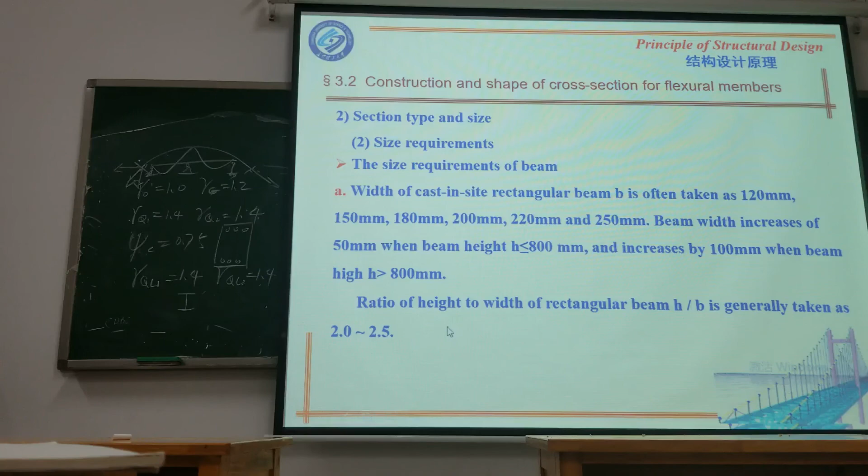And for the prefabricated span, we normally call it the height-span ratio. It's generally defined as 1 divided by 11 to 1 divided by 16, something like this, and a larger span often has a smaller value. What's called B, or the web width, is often taken to be this value, 15 to 18 centimeters.

It's not only a reinforcement arrangement but also a shear requirement. The thickness of the T-shape cantilever beam flange is not less than 100 millimeters, and the thickness of the beam flange is not less than 10% of the beam height.

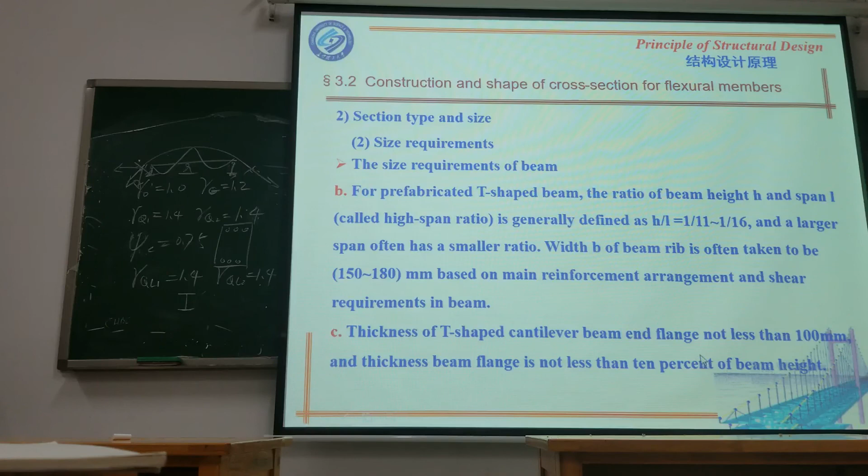So yeah, there's a lot of those things. She's over. It's over.